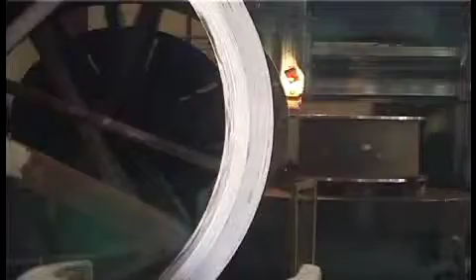We are into design and manufacturing of complete cement plants. Since our equipments are huge, there are enormous design and development activities.

Before engaging with Idea Design Solutions and opting for SolidWorks, our design cycle was very long. We used to have a separate team for generating the bill of material, and still there used to be a lot of rework in the shop floor, either because of errors or problems in the drawings.

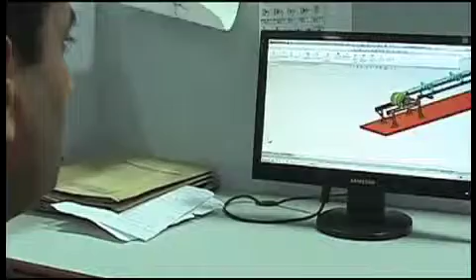But after using SolidWorks under the guidance of Idea Design Solutions, we have been able to considerably reduce the design and development cycle as well as rework in the shop floor. I can safely say that we have cut down our design cycle by 50 to 60% and rework by 80 to 90%, thanks to Idea Design Solutions.

One of the major challenges we used to face till last year was managing our engineering data. The reason being the quantity of the data, as we have around 1 lakh drawings, and moreover we have 20 people in the design team who generate huge data on a daily basis. This situation was very critical, as we used to waste a lot of time in getting the right information at the right time. The design cycle used to be very long, and mismanagement of data was also one of the major reasons.

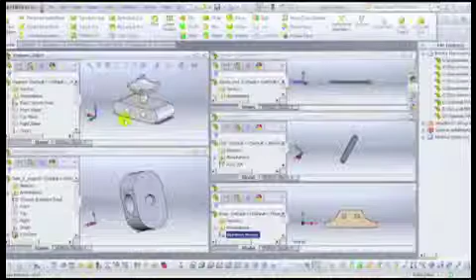We were then contacted by Idea Design Solutions, and their team explained how we could overcome this challenge with Enterprise PDM from SolidWorks. Today, after 6 months of use, we are able to not only securely and successfully manage the data, but reuse it very effectively. Each member has authorized access and can easily search or access the desired information.

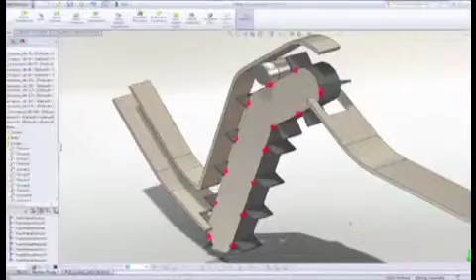The drawings are automatically revision controlled. The Enterprise PDM implemented by Idea Design Solutions has enabled us to be much more efficient in managing the data. Our workflow and engineering change processes are automated. Today, I can safely say that we reuse more than we rebuild, which was the other way around earlier.

In cement plants, a lot of our products are tailor-made. I mean to say that they are resized based on customer specifications. Conveyors and bucket elevators are a few such examples.

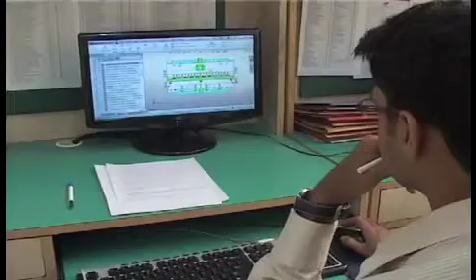If we have to design a new conveyor, we have to generate at least 50 to 60 drawings after resizing all of them, checking the BOM and other specifications. The changes are done based on certain calculations already known to us, but still the whole process used to take about 1 month.

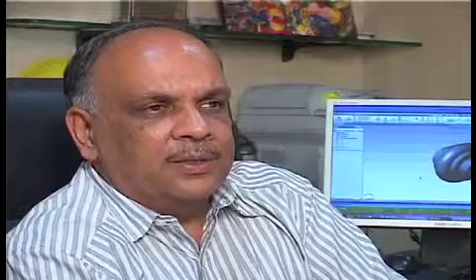We discussed this challenge with Idea Design Solutions, explaining that our product is tailor-made and there should be some system available to speed up the process. Then they introduced us to DriveWorks. DriveWorks, the automation technology, helped us drastically cut down the design cycle.

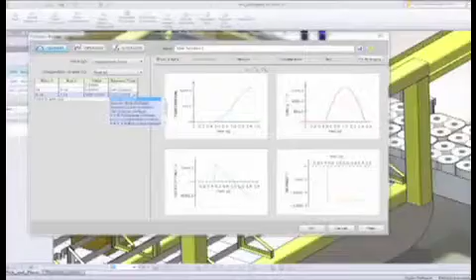The concept is to make a master model inside SolidWorks, define rules and calculations in DriveWorks, and DriveWorks works integrated with SolidWorks to help generate new variants or define new specifications. It automatically calculates and develops the new variant based on the design calculations and rules. Today we are able to generate conveyors in 1 day instead of 1 month, and we are now implementing automation tools for our other equipment.

What I would like to specifically mention here is that it is extremely important to choose the right technology partner to implement such tools, and Idea Design Solutions has continuously supported us to be successful with DriveWorks.

Yamunanagar is not a place where a lot of people invest a lot of money on technology, specifically on software. But the way Idea Design Solutions approached us was totally different. They never asked us to buy software; rather, they understood our entire process, right from customer inquiries to design and development activities, as well as the manufacturing process.

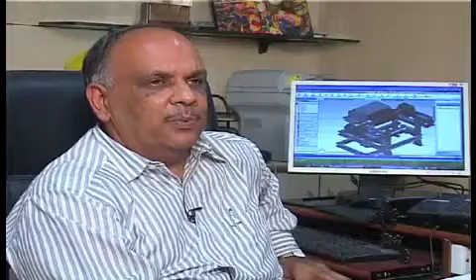The type of products we design, the process we adopt, and the problems we faced. They also interviewed our key team members, understood challenges at each level, and accordingly proposed implementing tools like SolidWorks, DriveWorks, and EPDM, along with their services, to overcome our challenges like the longer and costlier design cycle.

The solution helped us to be quite efficient, and we were able to deliver a greater number of projects in a particular time frame.

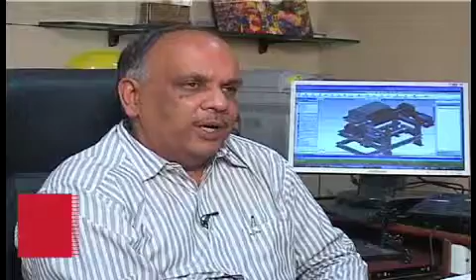Talking about their services, they take full charge of the implementation and push us to learn and use the tools in the most efficient manner. They conduct skill gap studies and audits to ensure the implementation is on track and take corrective measures accordingly. I am thankful to them for helping us achieve the desired objectives of the investments we had made.

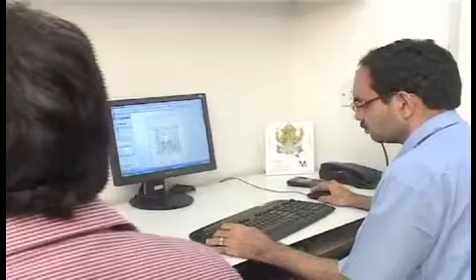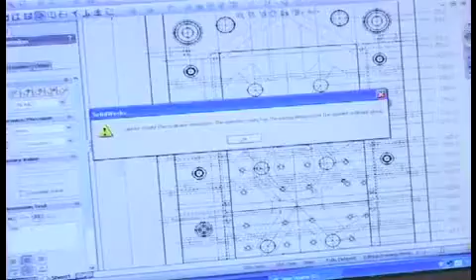SolidWorks has allowed us to generate the 3D component. Once the 3D component has been generated, the same model is used for designing the core and cavities. Further, in SolidWorks we also create the complete mold tool design, and with the help of 3D data we generate all detailed manufacturing drawings, along with all the required tolerances and other annotations for shop floor people.

By creating these drawings quickly in SolidWorks, we have saved most of the time it used to take us to create views manually in 2D software.

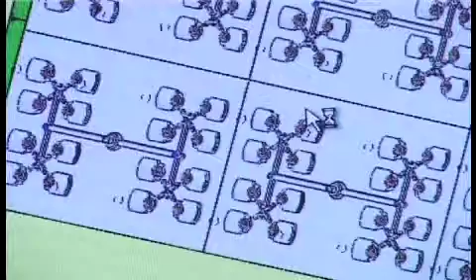I want to say that all the designs which are being made using SolidWorks and finally manufactured look phenomenal. In particular, I am very impressed with the visualization of the design and how easy it is to do the required changes. We really appreciate the efforts of the Ideas Design Solution team that went into implementation of the technology at our company and helping us find solutions for the problems we face on an everyday basis.

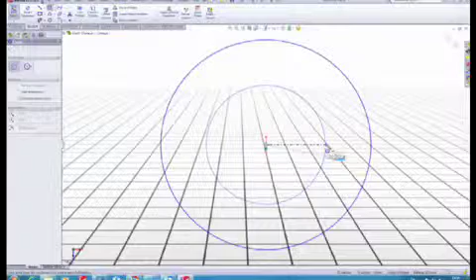ANG Auto is the largest manufacturer of trailers in India. We supply trailers to Ashok Leyland, Tata Motors and various other OEMs. 55% of our revenue comes from the automotive components which we supply abroad. So design plays a very crucial role in our company, and recently our company has also entered into the prefabricated plant structure business.

ANG Auto started its business as a manufacturer of air brake assembly, and later on we diversified our portfolio. We started making all the components that are used in a trailer, and as I said, right now we are the largest manufacturer of trailers in India.

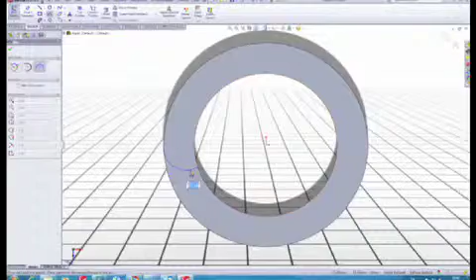Since we are in the commercial vehicle segment, design plays a very crucial role in our industry, because with the rise of fuel prices, especially diesel prices in India, transporters generally overload the vehicle. So analysis plays a very crucial role in our product design.

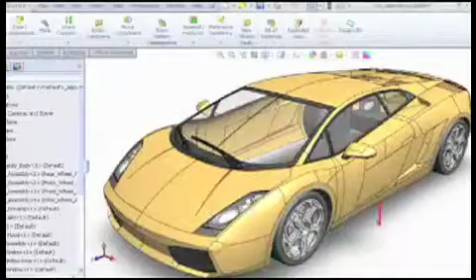With the help of SolidWorks simulation we are able to analyze the weaker parts in our vehicle structure and find out where the maximum deflection would be, and where the product is likely to fail. That is why design plays a very crucial role - both design and analysis.

Before we chose SolidWorks, most of our drawings were in 2D software, so we used to face a lot of dimensional errors. Sometimes it used to happen that we'd receive a call from the shop floor saying we are not able to integrate one component with the other.

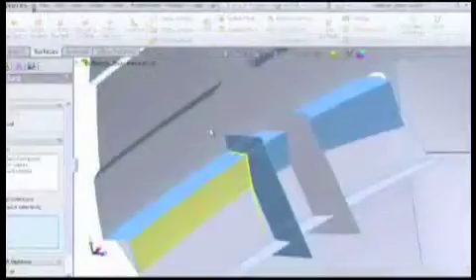After we started using SolidWorks, we were able to reduce our design errors significantly, and not only our design errors but our whole product design cycle as well.

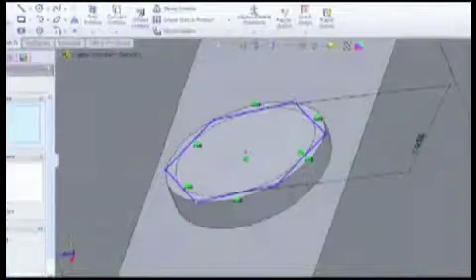Since we are in the commercial vehicle segment, which are generally overloaded by end customers to substantially increase their profit, design analysis plays a very crucial role. When we do our design analysis, we are able to identify weaker parts in our vehicular structure and find out where there would be maximum deflection and which parts are likely to fail first. In that way we are able to design better products with the help of SolidWorks simulation.

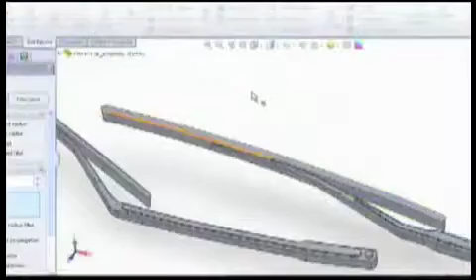There were multiple reasons which led us to choose SolidWorks. First, we were looking for software that is very user friendly, so that we could train our existing employees in a very short span of time. Second, most of our clients and vendors - we were looking for software in which we were able to import geometry very easily with the least amount of import errors.

And third, we were looking for software in which analysis modules were already built in, so that apart from 3D modeling we could also analyze our vehicular structure.

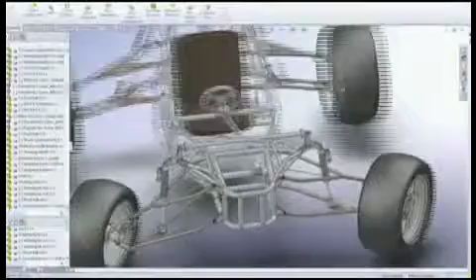In 2005, we chose to replace our existing 2D package with SolidWorks. A SolidWorks representative conducted a benchmarking process that demonstrated SolidWorks' capabilities for complex assembly models, generating manufacturing drawings, testing performance, and simulating operations of a virtual prototype. After seeing these demonstrations, the division's management was convinced that we needed to move to SolidWorks. And today we can say that we made the right decision.

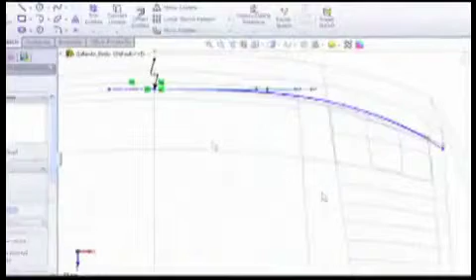With SolidWorks software, we can make design changes more easily. The software has also helped us by increasing productivity, shortening design cycles by at least 75%, accelerating time to market by 40%, and trimming development cost by 60%.

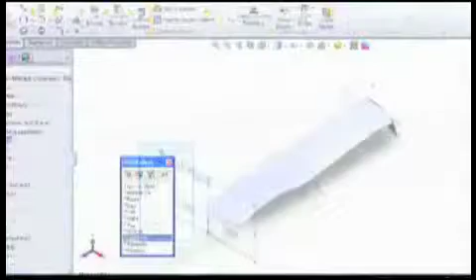The software is really helping us improve new product development, and we have used it on more than 400 products. Using the integrated simulation module in SolidWorks Premium software, our designers can more quickly evaluate concepts and validate designs, which contributes to the company's improved performance.

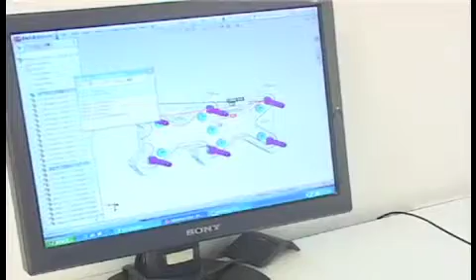The SolidWorks simulation tool has a user-friendly workflow and approach, and enables us to test models digitally. Because it provides an effortless, automated approach to 3D meshing, it is the simulation tool of choice for our designers. We prefer SolidWorks simulation over other analysis tools that we have evaluated.